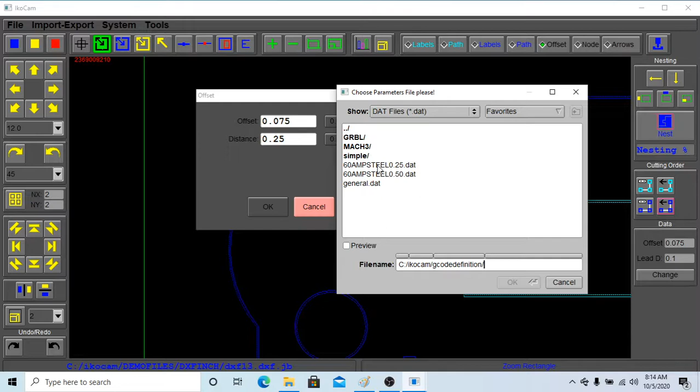Okay, let's do it like for plasma. But if you want to be more precise, then we use and choose material. So for a 60 ampere plasma unit and quarter inch size thickness of material, it will choose a proper value for offset and offset distance.

Okay, so let's turn off offset now because we don't need it at this point. I'll show some basic operations.

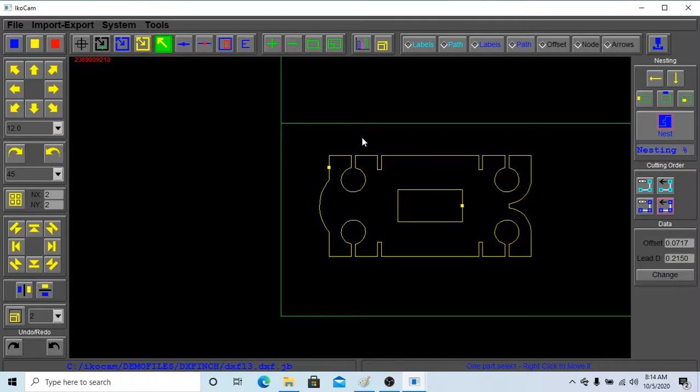If you use this button, it will select one part and move it, so you can move parts anywhere you want. Also, if you press down the right mouse button and drag, it will pan the whole drawing. So we can zoom in, zoom out, zoom to full table, or zoom to material like drawings.

The big green screen represents the table, and the small rectangle represents the material. I'll show you here when I change the material to, say, 55 inches.

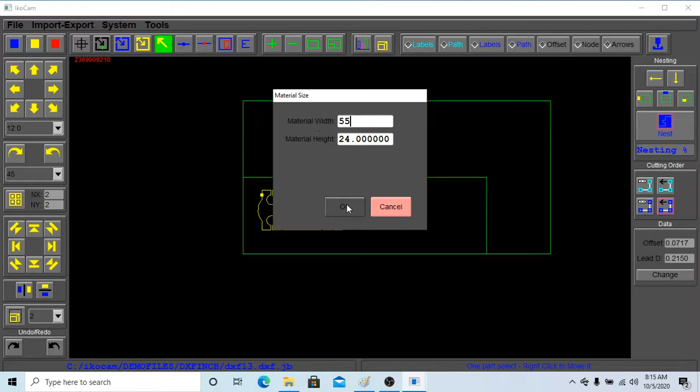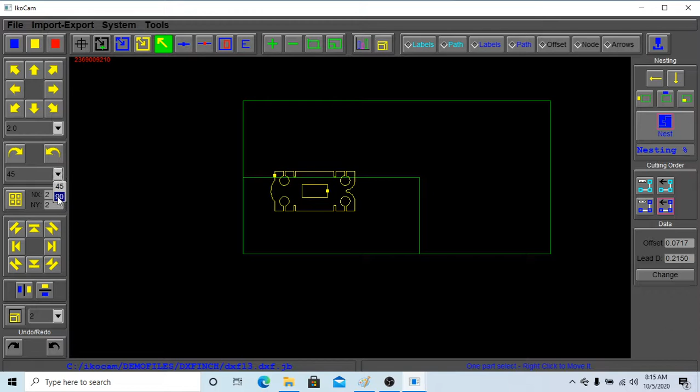It changed. So to move this part around, we can use those arrow keys, and here is step. We adjust the step. Let's say I want to move it 2 inches up or down or left, or this arrow, or here. Also I can rotate by 45 or 90, or let's say 33, and then I press rotate.

But I can undo all that. So here I move it to origin, and so I can move it here.

How can I make an array? Let's see, I move it to origin, and then I need a 3x2 array on my screen. Enter 3 here, and it will - oh no, sorry, I have to select it first, then here is how we array it. So I don't need that now.

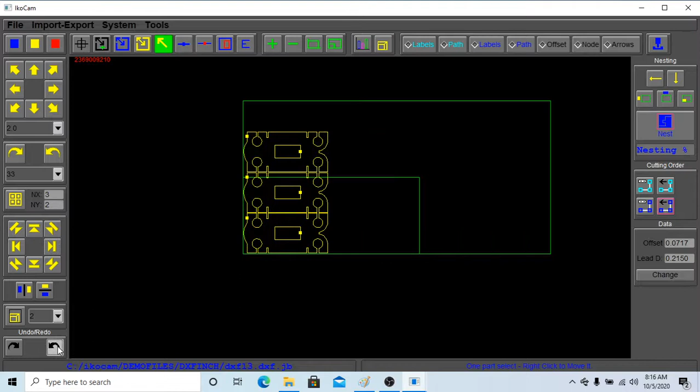The other way of arraying it is by using these buttons. It will move part and copy, making a duplicate like this. So if I select all 3 and duplicate this way, it will make it this way, copying. Okay, I'll undo everything.

Also I can open another file, but in this case I'll open the job from other files I previously used, like this. I'll use this one, let's say. I'll open this - this will not open this file, but open the already existing opened file, and it will open somewhere on the top. Let's select that one and make some copies.

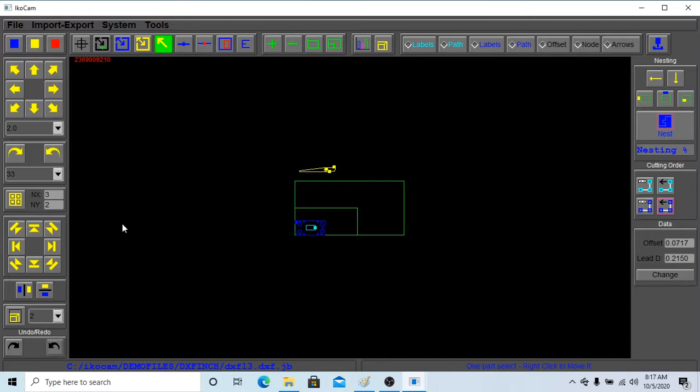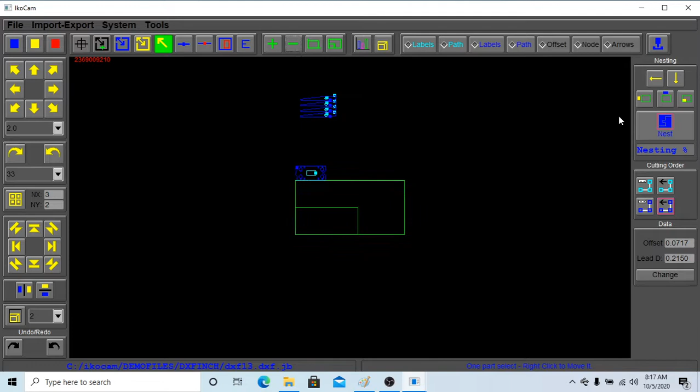Okay, now I want to nest that. So first I'll move everything out of the table, so the program will know nothing is nested yet, and you see everything is out of the table. So I'll zoom it out, zoom it in a little bit.

I can turn path to watch, and then I start nesting. It will nest the first biggest part, and then it will nest. Look, this one is too big to nest anywhere, so it's out of the table.

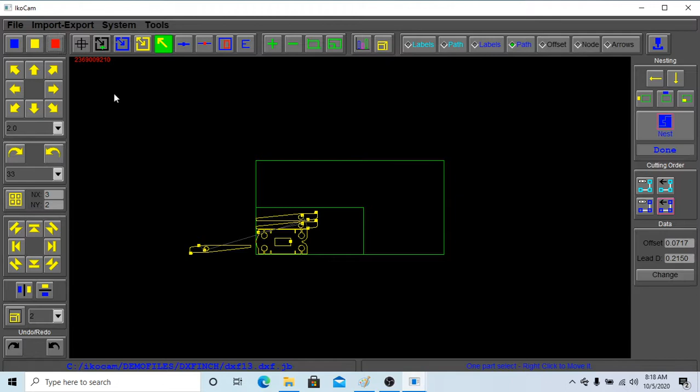So now, let's say, deselect all. I can select this, deselect all, and select only this outside of the table and delete them, because I want to create a G code for this drawing.

First I'll fit here, and then I can automatically set lead-ins. But I can do it manually if you don't like what the program did for me.

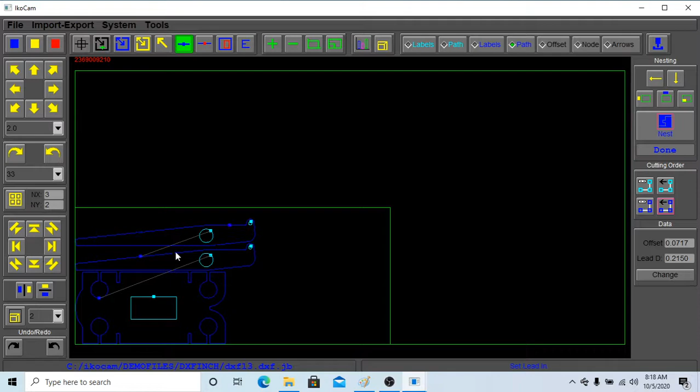After that, there are 4 buttons for reordering inside or outside parts, but you will mostly use this last button to reorder path automatically.

And then you press - I'll generate G code for this, and I'll choose arc-like lead-in, arc-like lead-out, or line as lead-out. Then I'll choose material for this, and then press generate G code.

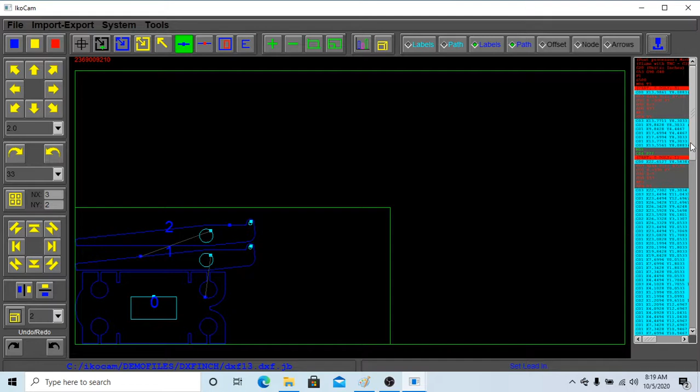Okay, and I don't need to save it because I'm not cutting it. Okay, close this dialog and go to tools to go into G code mode, and then let's click here and zoom.

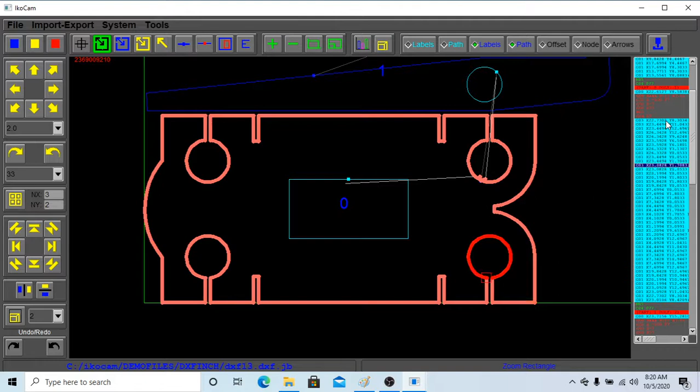Zoom in, and now I can watch one by pressing the arrow key and scrolling down the list box on the right side, and see how it will be cut on G code, and that's it.